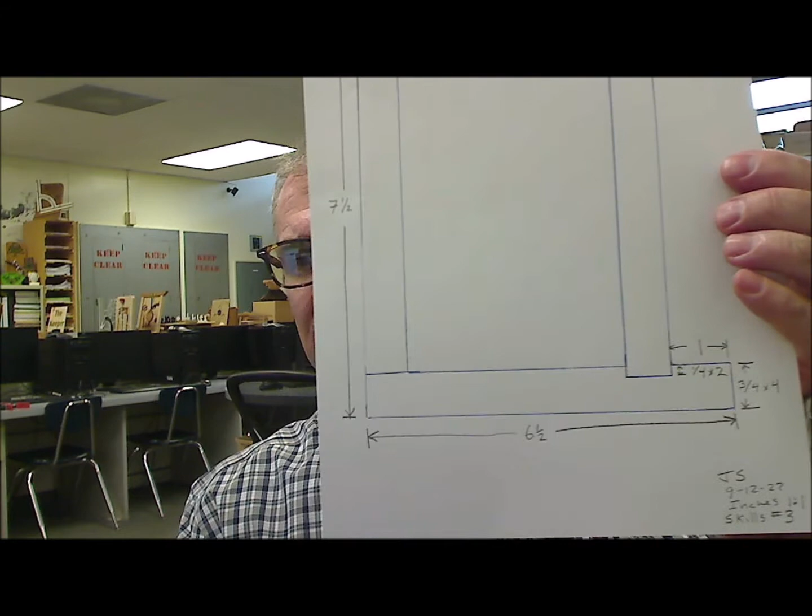You want to take this wooden block, lay it down on a piece of paper, trace it, transfer all of the measurements to the paper, and then we'll draw it in Fusion 360. So as you look down here, this right here is to a depth of 1/4 inch times 2. And the reason why it's times 2 is in this rabbet, that would be 1/4 as well. And then down here I have 3/4 x4. That is saying that all 4 boards are 3/4 thick.

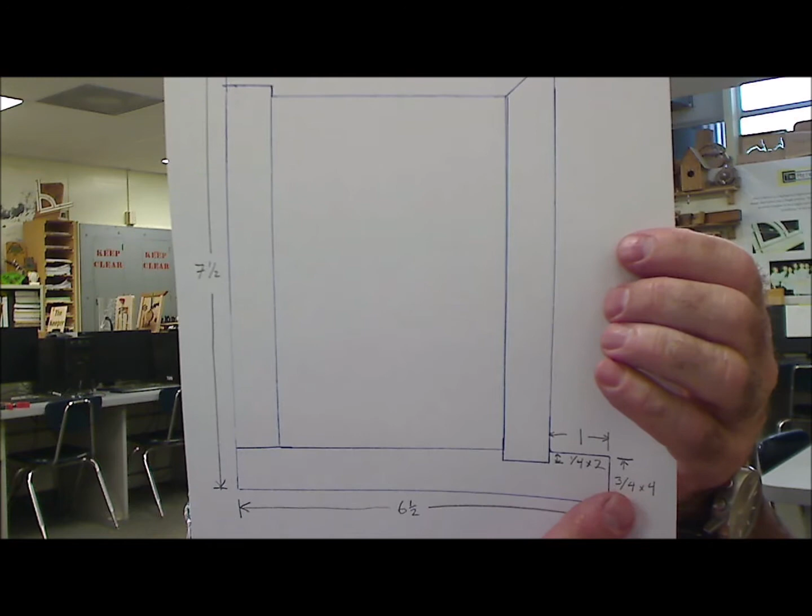Overall length right here is 6.5. Overall height 7.5. I can find pretty much every length off of this drawing right here. Make sure you have a title block in the bottom. And again, this CAD drawing in Fusion 360 is going to be a portrait, not a landscape. So let's go ahead and start drawing this.

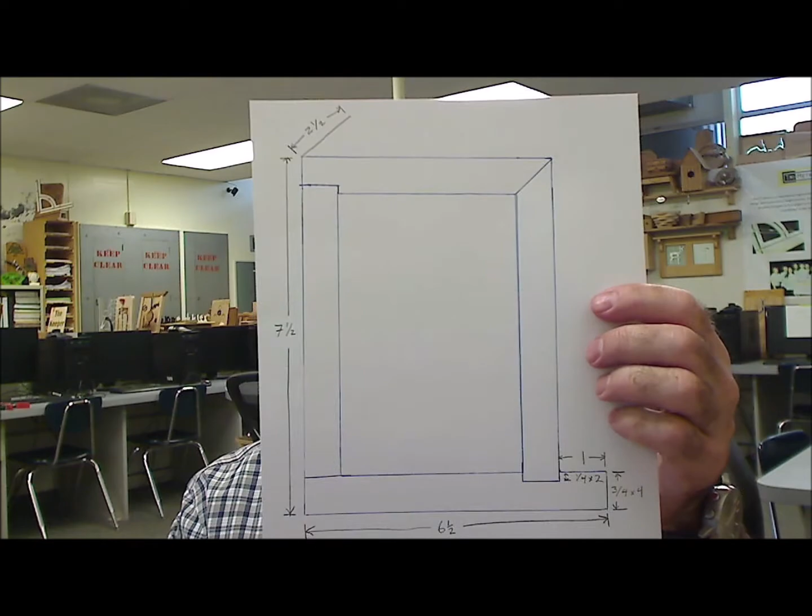So we're drawing this block right here. I'm going to think about how I'm going to draw this first. I'm actually going to draw this block flat and kind of keep it placed down. I'm going to draw this plane here in XY and extrude it in Z. I am not going to create a sketch. I'm going to create a component. So this is going to be component number 1.

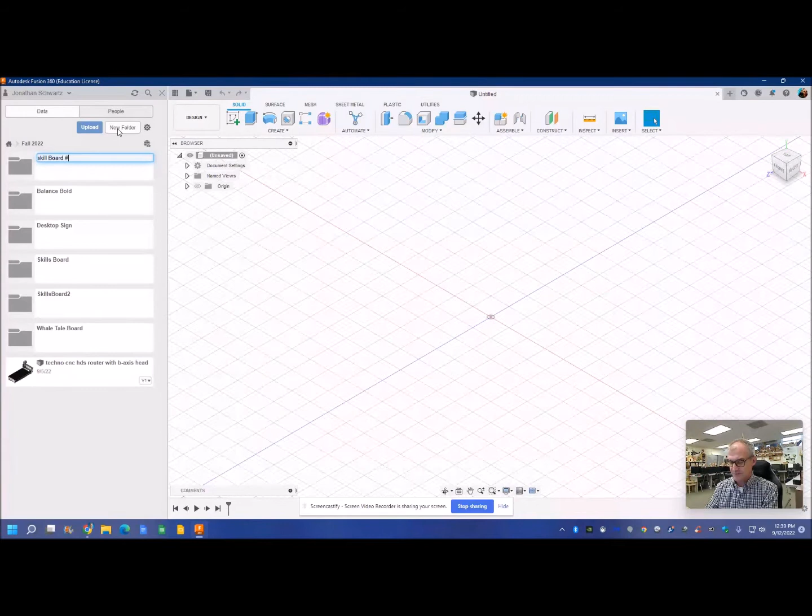And remember, you always want to start here. I'm in the file management system on the left. In fall of 2022, I'm going to create a new folder. I'll call this folder skill board number 3. Then I'm going to click in that folder, and all my drawings are going to be saved in there. After I've done my file management, I go and I double check my settings and make sure I'm in inches.

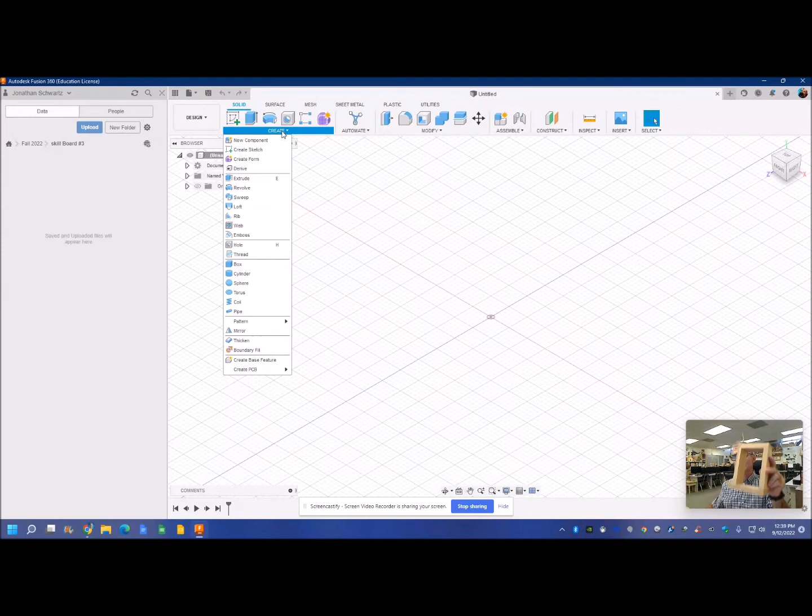Okay, so now I'm going to go up here to create. I am creating a component. Again, this is going to be 4 components in a single part. I'm going to do all those drawings in the same drawing. Okay, so I'm going to create a new component. This is component number 1. Okay, and then I want to draw it in the YX plane.

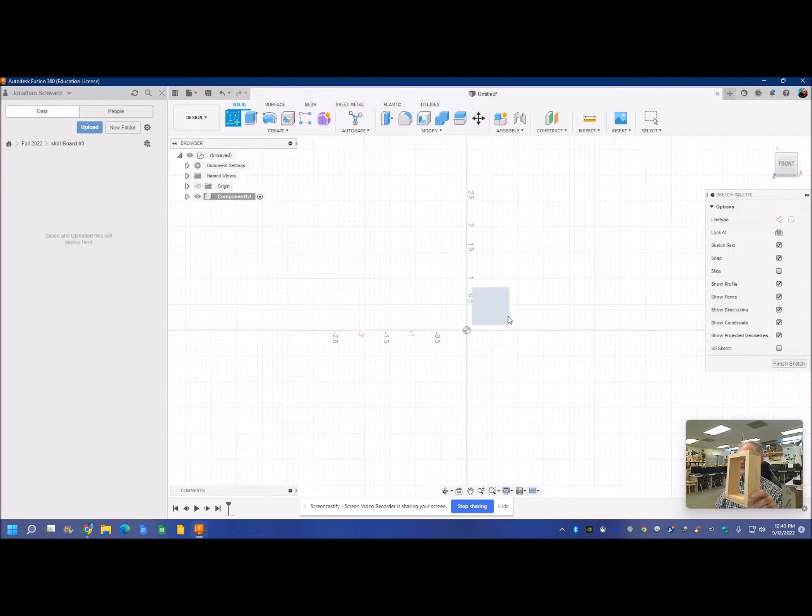So now that I've created a component, I go create sketch. And in that sketch, I'm going to draw in the green and red, meaning the YX plane. So I'm going to snap there, and I'm going to draw this rectangle here. So I'm going to create a rectangle. I'm going to snap at the origin. I'm going to go over 6.5 and up 3/4. Click, enter, pull the roller ball down, center it up a little bit.

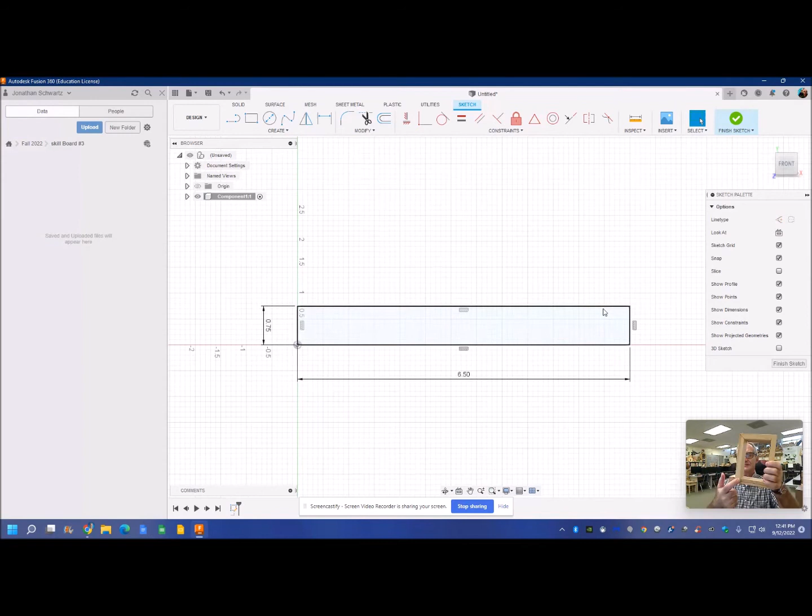After I'm done drawing my rectangle, I need to come over 1 inch to draw in that dado right there. So I'm going to go create a line. I'm going to make it a construction line. I'm going to snap at the origin. I'm going to come over 1 inch. So I'm 1 inch over, and I'm going to go up to a rectangle.

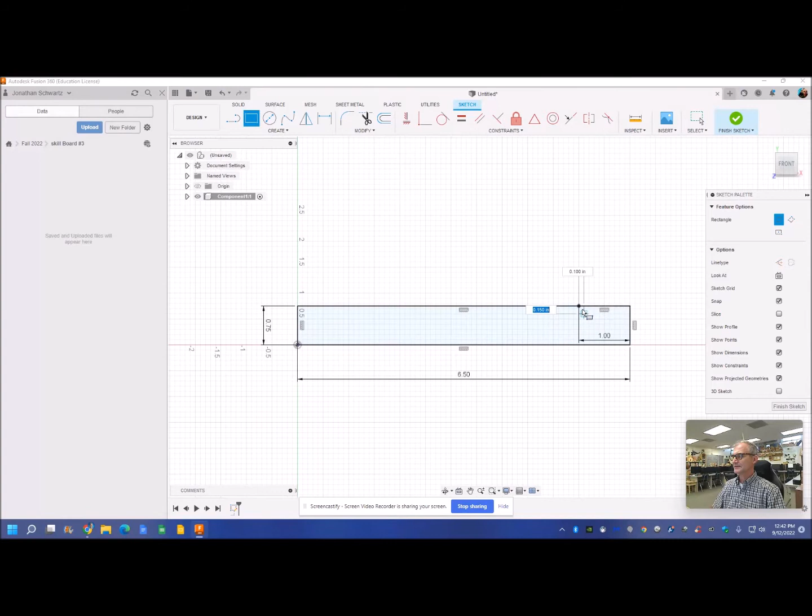This is not a construction line, so I'm going to turn that off. I'm going to snap at that endpoint. It is 3/4 inch wide. So 3/4 inch wide and 1/4 inch deep. And then I'll click. And there it is. Right click, OK. Now I'm actually done that sketch, and I'm going to extrude this out.

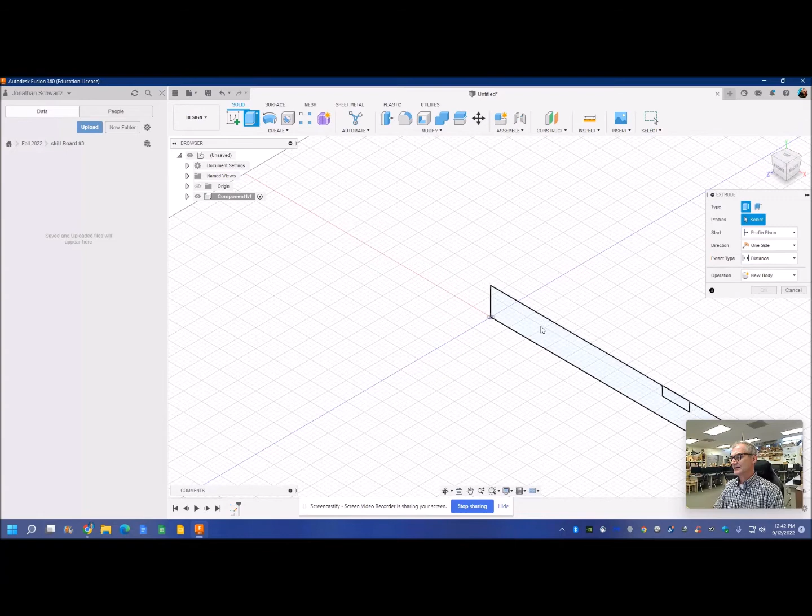So I'm going to hit extrude. I'm going to pull this board out. You can see the dado is missing. And the width of this board this way is 2.5 inches. So I come out 2.5, enter, and there's my block of wood. And then I'm going to draw all my components kind of in place, and then I'm going to hold them together under assemble here. So next I'm going to draw this board up right here.

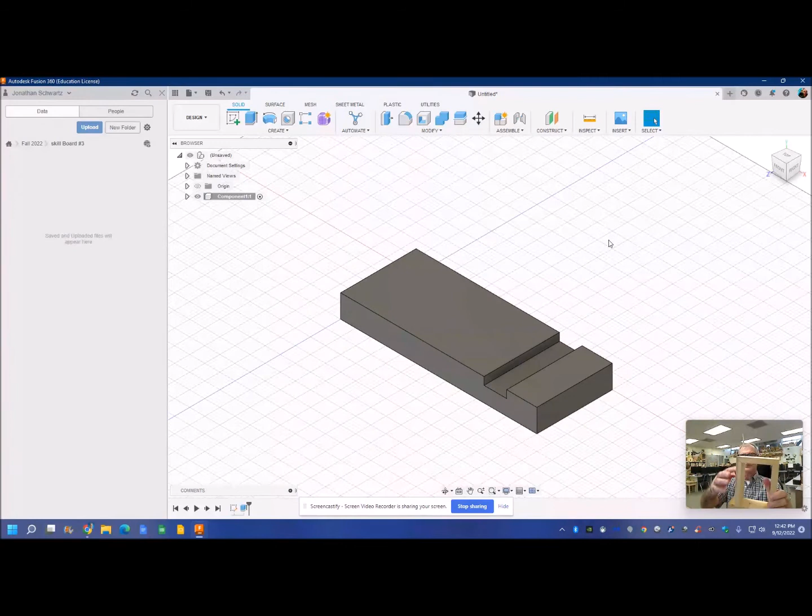So I'm going to draw that sketch here. But I'm not going to just create a sketch. I got to create my second component. So go create, new component. This is component number 2. And then I go back up here to create a sketch. I want that sketch to be on the bottom right here.

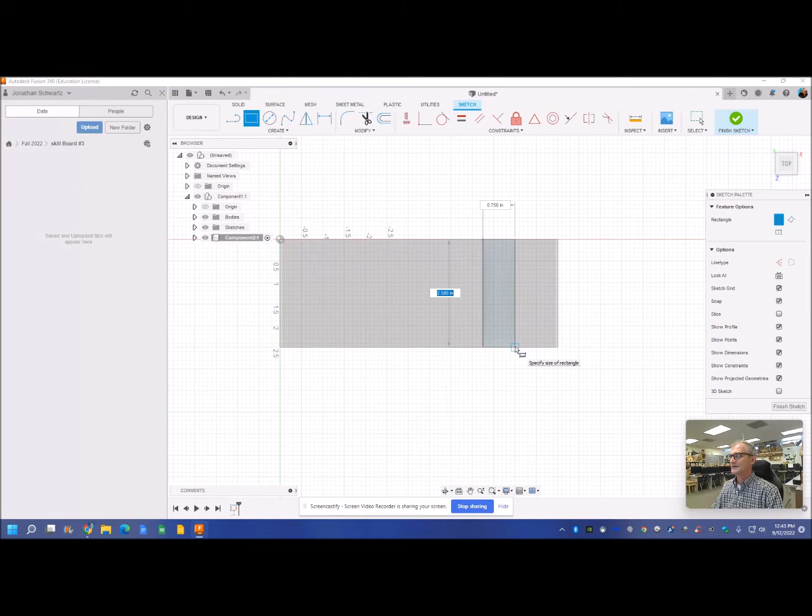I'm going to draw the base of this rectangle. So I'm going to create a rectangle snapping from there to there, 2.5 by 0.75. I'm all done. Finish sketch. And then I'm going to extrude this rectangle up. I come up 7 inches and then enter. Using the roller mouse, I'm down. I'm still in component 2.

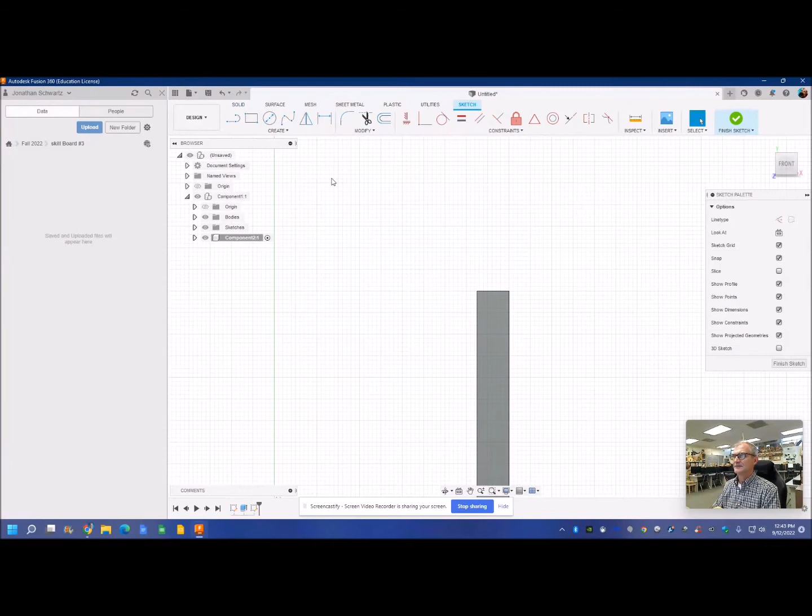I'm going to create another sketch to cut that miter. So I'm going to go create a new sketch on this plane right here. I'm going to draw a line from this corner over here. I don't actually know how long that is, but I could just make it too long, whatever that is, tab.

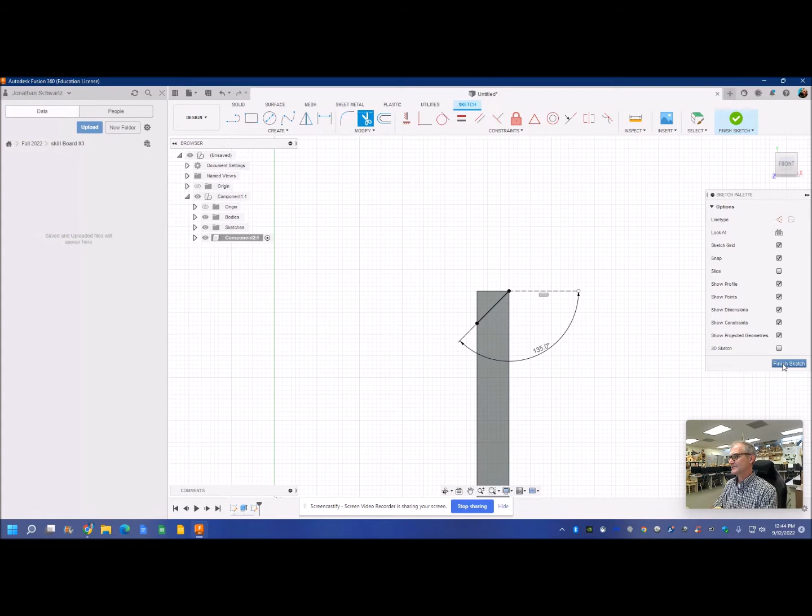135, enter, over to trim and trim that off. I'm going to cut that off. So I'm going to finish that little sketch, single line. I'm going to go to extrude. I only want that. I don't want to extrude that way. I want to cut it off that way. I wouldn't cut it past. I would keep it right at the endpoint at 2.5. Enter. And now I'm done my second component.

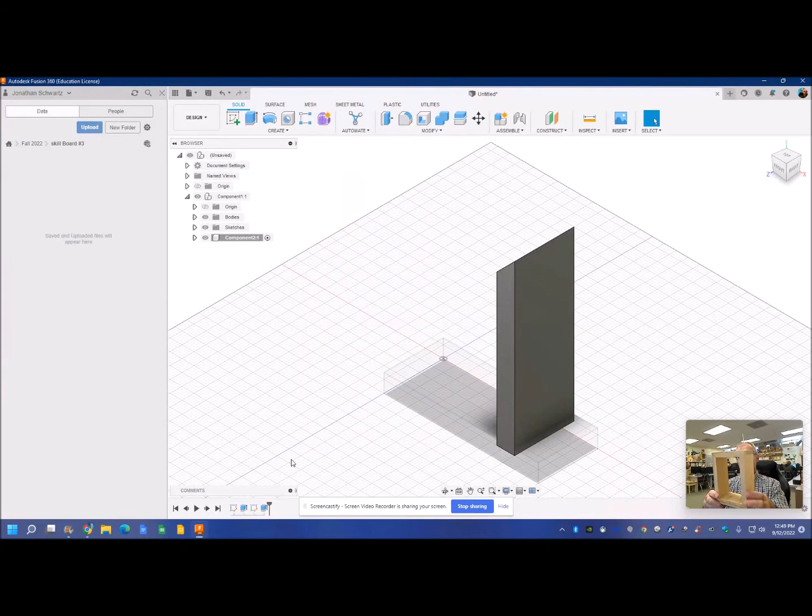Okay, now that my first two components are drawn, kind of see how they're looking. I'm going to draw my third component next. I'm going to do this one. This is just a rectangular block. I'm actually going to draw this rectangle first and then come up, I think, 6.25. So again, I create component first. So new component, it's component number 3. I'm going to draw it on the top of this block here. So create sketch. I want on the top of this block, so right there.

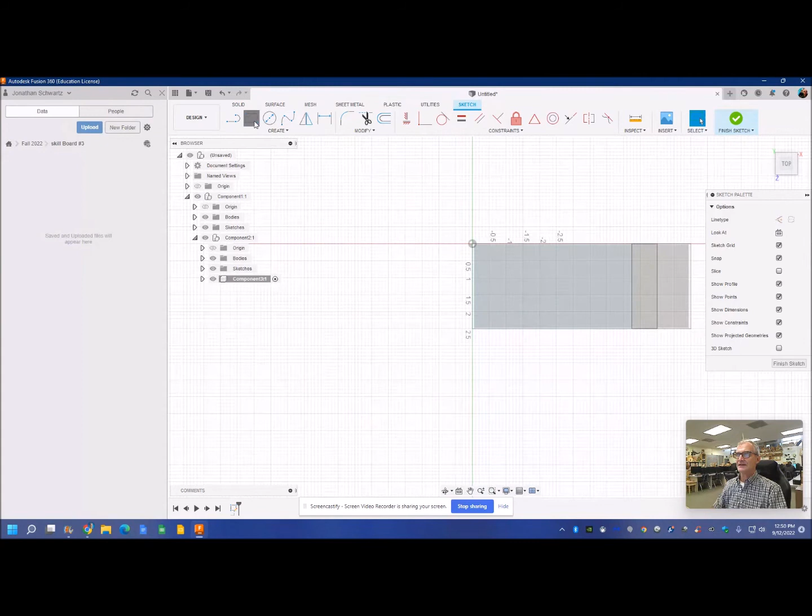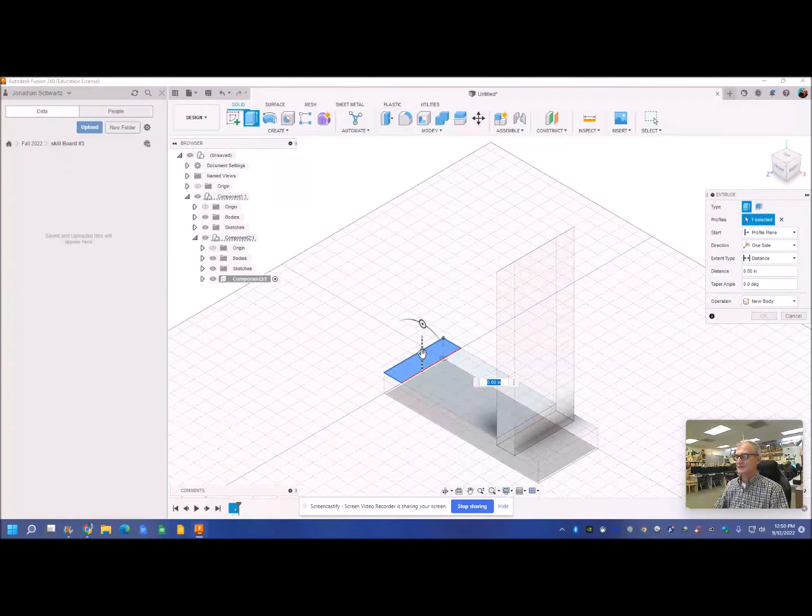And then I'm going to draw a rectangle from here to here, so it's 2.5. Tab, and it's 3/4 wide. Enter. That's actually it for that whole sketch. So I finish the sketch. I'm going to extrude. So I'm going to use my extrude key here, grab this, and I'm going to extrude it up 6.25. Enter. And actually, I'm all done there.

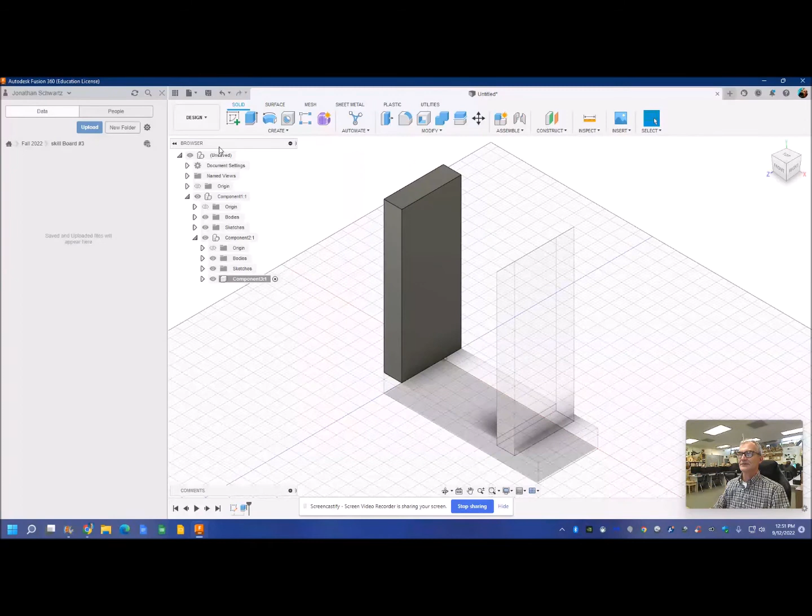And then I got to draw my fourth component. If you're looking in the bottom corner, I could do it a couple different ways. I think I might just draw this little rectangle first. So then I'm going to go create new component. This is component number 4. I'm going to create a sketch on the top of this right here. And then this is only going to be a rectangle from here to here.

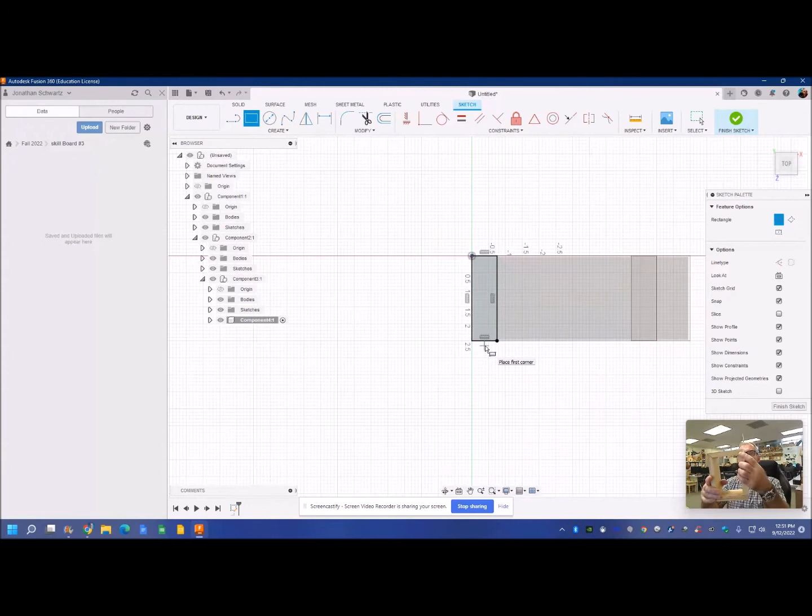Remember, this rabbet right here is 1/4 inch deep. So I'm just going to extrude that up 1/2 inch. So I'm actually done that sketch. Now that I'm done with that, I go to extrude. I click that. I'm going to extrude it up 1/2 inch. And still, this is my fourth component. So I'm going to stay in this fourth component and do a bunch of different sketches to bring it over. And you'll see that my components will all be separate things.

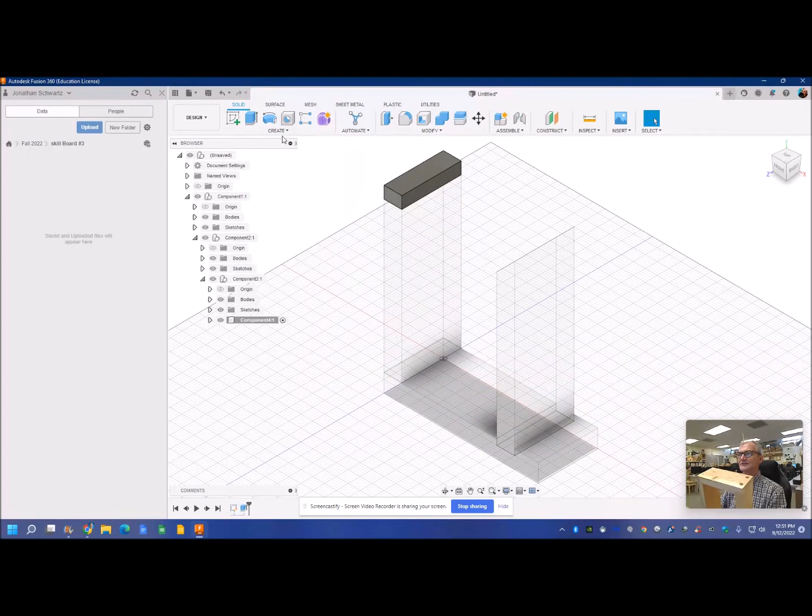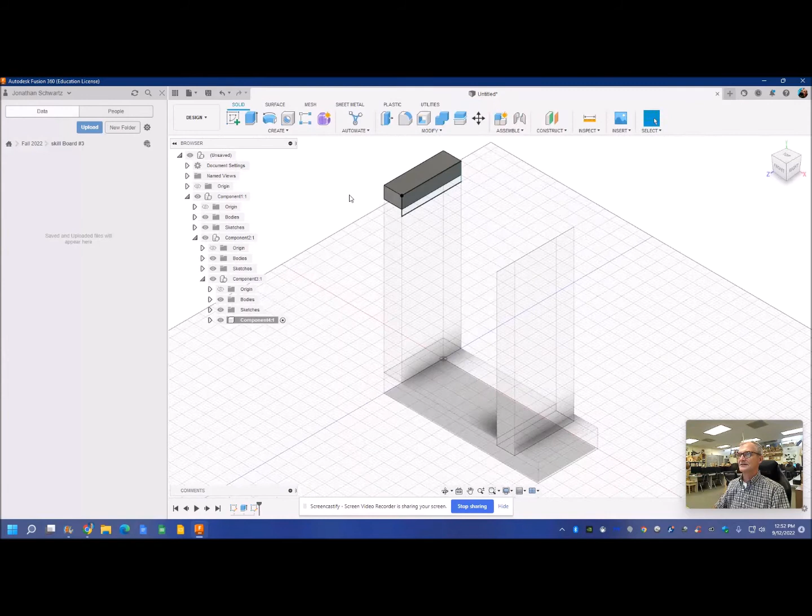So now I'm going to create another sketch, and I'm going to do it on this plane here. And I'm going to create a rectangle from here down here. So it's going to be 2.5 and 0.75 now. Enter. I'm going to finish that sketch. I'm going to extrude this sketch, this, and this. I'm going to drag them over here to 4 inches. So that's it right there. 4 is correct. I'll hit enter. And you can see as I go to my home view and move it around a little bit, that it turned into a single component still.

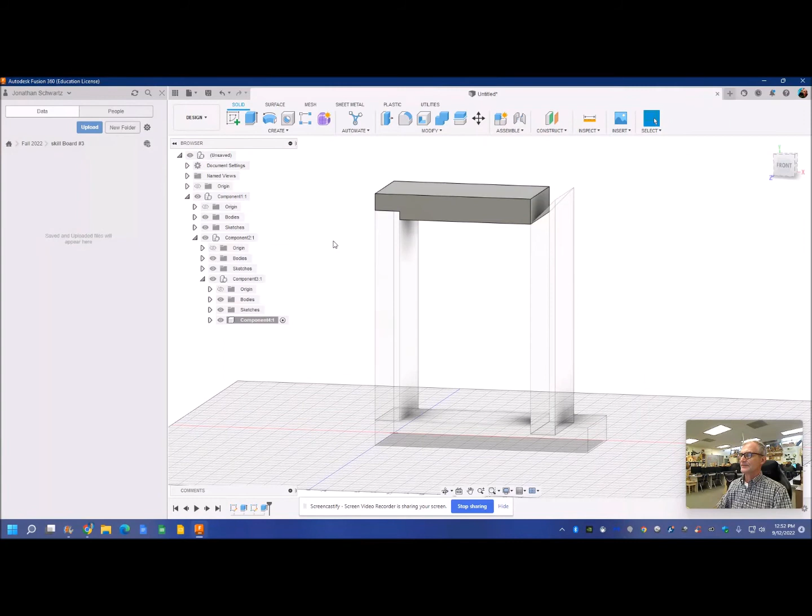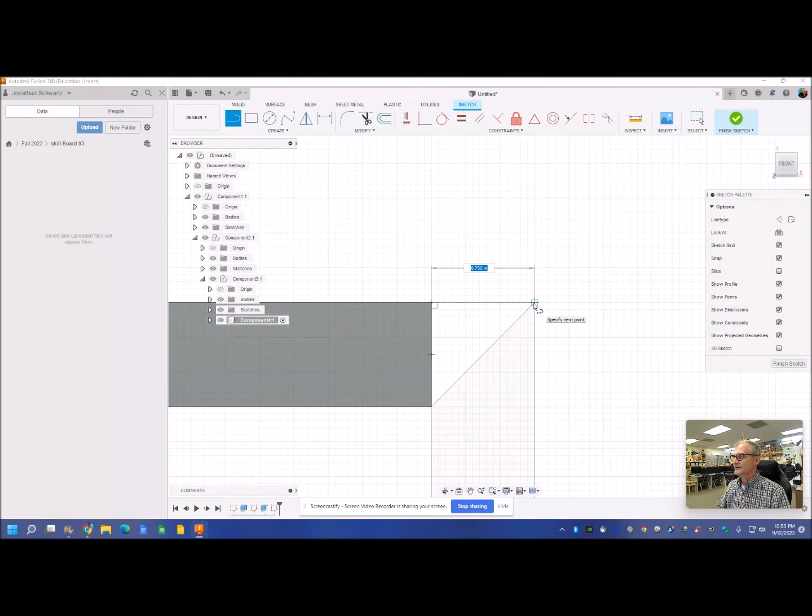So I need to do one more thing. I need to draw a triangle here and then extrude it out. So the way I'm going to do that is I'm going to create a new sketch. It's going to be on the front plane here. It's going to be this triangle here. I could do it with a line and go from that point. Let me zoom in a little bit to that point. Right click, OK. And then I'm done with that sketch. And then I'm going to extrude this sketch back in here, the 2.5. I'll hit enter. So now I'm all done. I've drawn all 4 of my components.

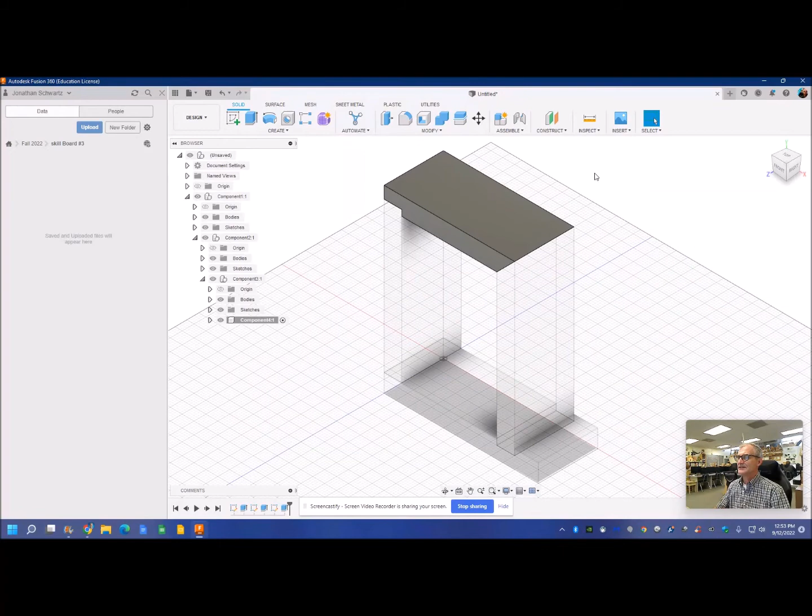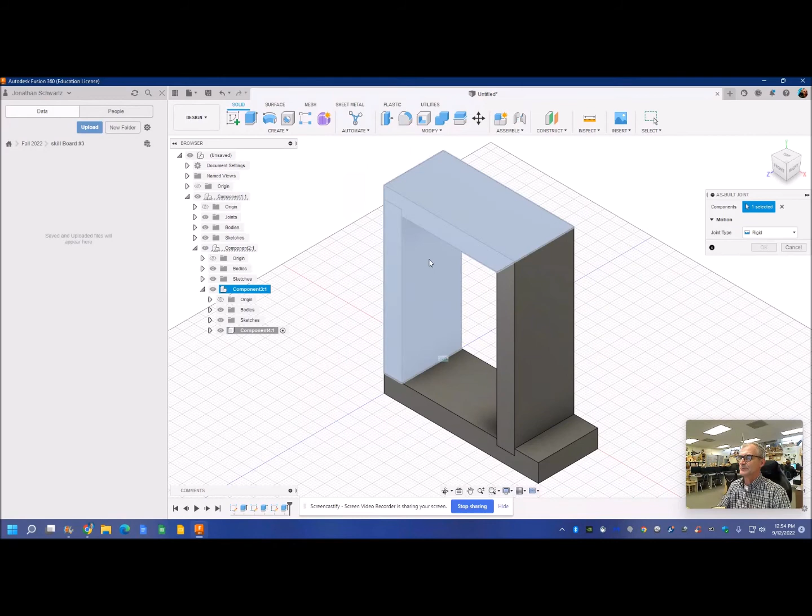But if I were to grab them and move them around, they wouldn't be stuck together. So I need to constrain them. I'm going to do that with an assembly. Under assemble right here, I'm going to actually constrain them as built joint. I'm going to constrain this part to that part. So that's constrained. Okay. And then now I'm going to assemble as built joint this part to that part. Okay. Assemble as built joint this top to this side. Okay. And then assemble as built joint this side to this bottom. Okay, and I think I have them all. See how they're all stuck together now, so that's what I want.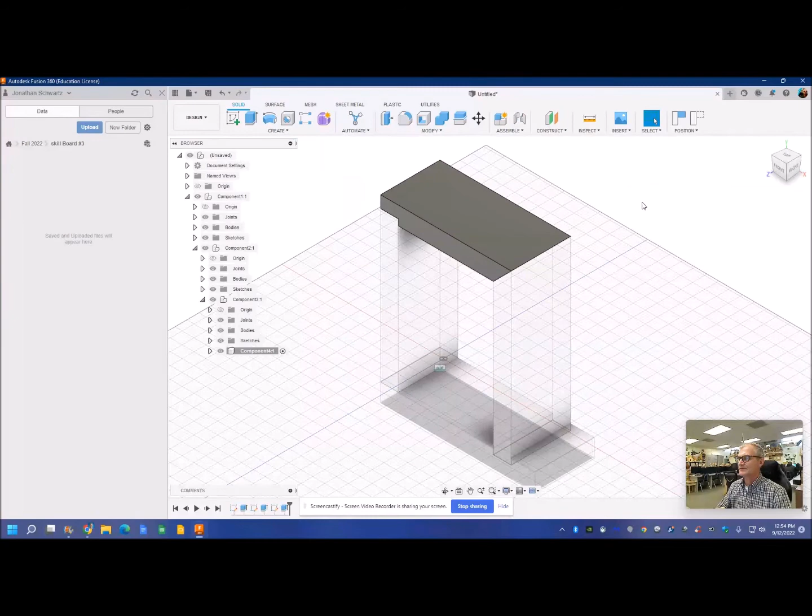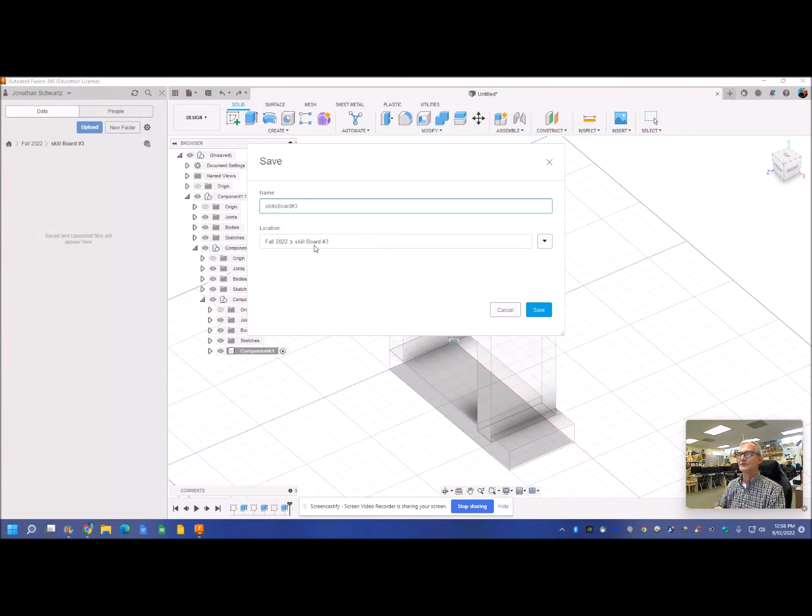So I'm all done drawing my part and the 4 components. I could look at them all and see that all my joinery is well. I could hit appearance and make it a material I want. I could close it and file, save it, or I could just go up here, file, save as. So I'm going to save it. I'm going to call this skills board 1. No, I'm not. Skills board number 3. So now that it's saved, now I'm going to go back to design. I'm going to create a drawing from my design.

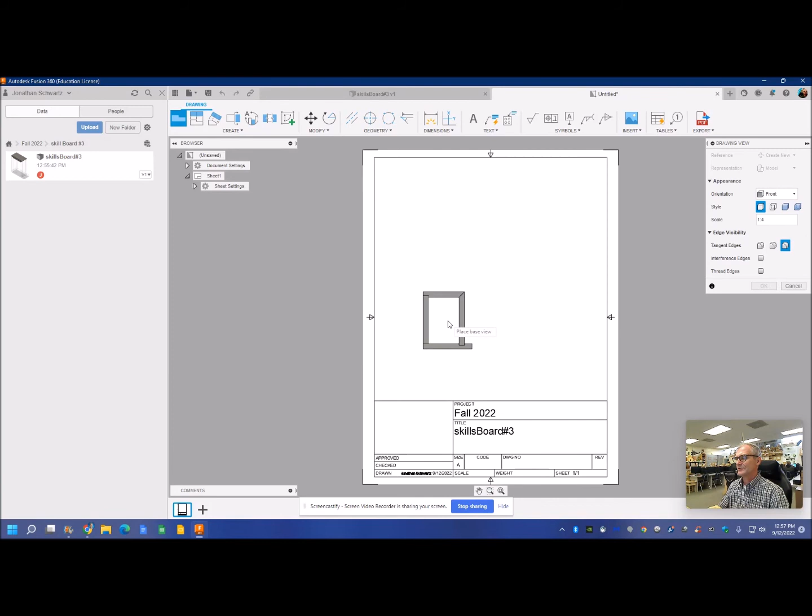And then what kind of page you want to make it. This one we're actually going to do an A-size paper, but in a portrait format, so 8.5 by 11. Okay, and I'm in inches there. Here's my paper with the block in the bottom. This is a 1:4 scale. That looks a little too small. Let me try 1:2. That looks pretty good. My front view.

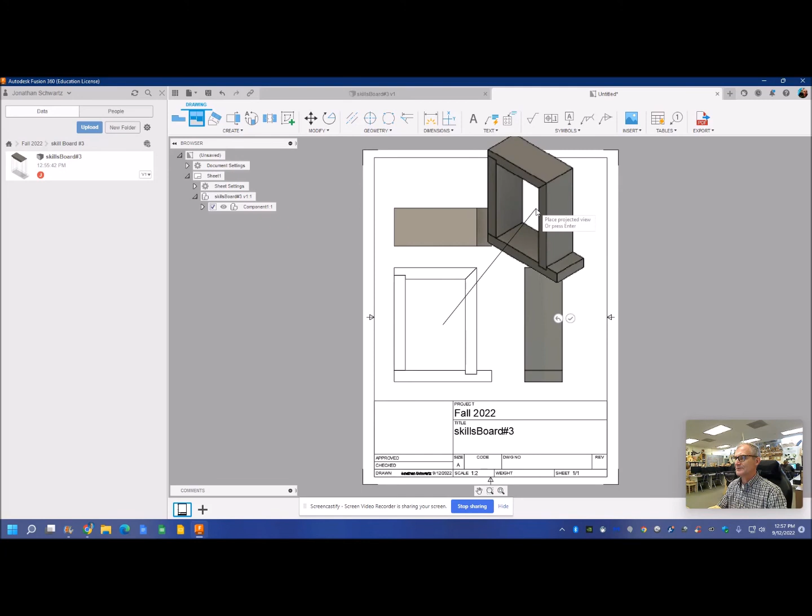Then I'll go up to projected view. What do you want to project? I'm going to project that up. I'll project it over this way. Maybe a little more room. And then my ISO up here. That's going to be too crowded, so I think I'll do my ISO in a different scale. So I'll just hit enter. I could move that up a little higher. These have to line up perfectly.

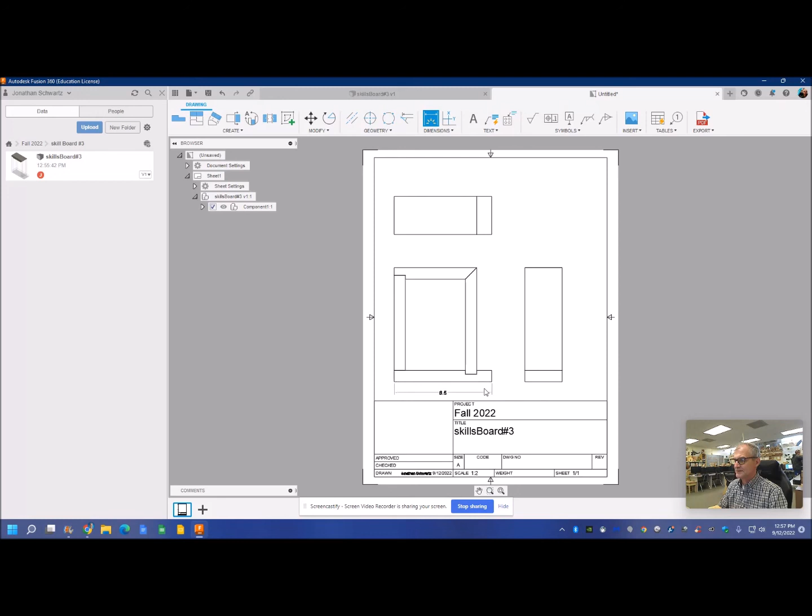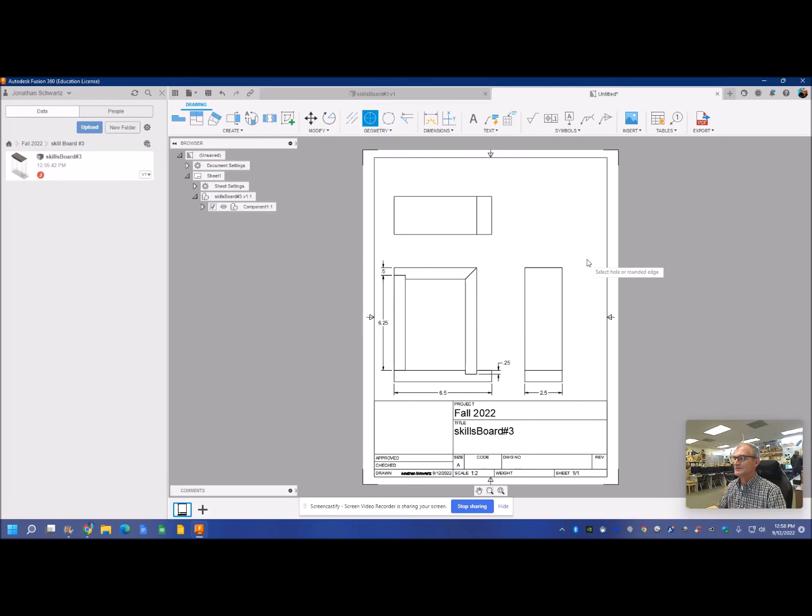And now that I have these drawings in here, I'm going to put in dimensions. I want the bottom dimension, that dimension, a little crowded. I'll put in that height there. Certainly want the depth of that dado somewhere like right there. Make sure under the text box you create notes. Start it on there, make sure you're logged in. It has your name and date on it. You probably want the ISO in the upper right hand corner. You're going to need a few more dimensions than that. But that should get you drawing.